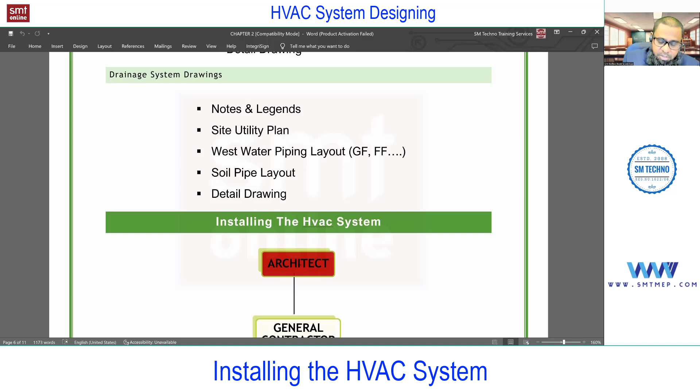So for a big project, it's a chain. But just at this level of installing the system, assume I'm talking about the HVAC subcontractor.

Now assume the architect, or the main consultant, has all the design drawings. Or you can consider the contractor. In case of a big project, the main consultant will provide the job to the main contractor, and the main contractor will provide the job to the design consultant.

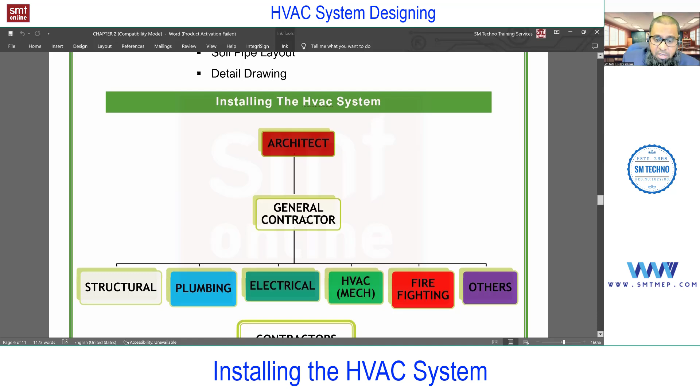Assume the design consultant completes the design, and the design drawing is submitted back to the main contractor. Now the main contractor will provide this drawing to the subcontractor. So this architect at this level is the main contractor, providing information and drawings to the general contracting company, which will provide the drawings to the subcontractor.

In the subcontractor category, you'll find structural, plumbing, electrical, HVAC, firefighting, etc. But at this level, we're bothered about HVAC. So we'll discuss HVAC. Just one minute, yes please.

So you are saying the architect is the main consultant? Yes, you can consider the architect as the main consultant. But in the main consultant team, you'll find the architect and mechanical and electrical engineers. For a small project, you can assume the architect is the main consultant.

But here you are saying the architect is the main contractor? No, the main consultant or the owner's consultant provides the job to the main contractor in case of a big project, or else directly provides the work to the subcontractors. It depends on the case. Just focus on the concept - in actual practice, as per location and type of project, these options may vary.

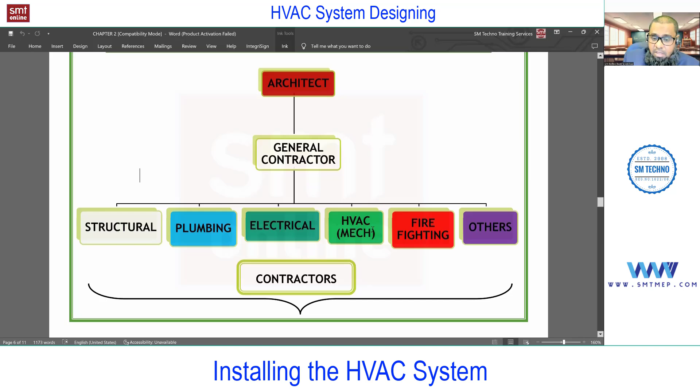So the point is, the contracting company takes care of installation. Here I'm bothered about HVAC. So what are the steps involved in installing the HVAC system? The mechanical or HVAC contracting company takes the HVAC consultant design drawing, also known as engineering or contract drawing - you can call this the tender drawing, from the consultant to the contractor.

Next, you'll find the term IFC also - issue for construction, or we can call the detailed design drawing IFC, or the shop drawing. You can consider IFC as issue for construction, as per the case.

So the mechanical or HVAC contracting company takes the HVAC consultant design drawing, also known as engineering or contract drawing or tender drawing, and then prepares the shop drawing, as we discussed in the types of drawings. Shop drawings are detailed drawings at larger scale, minimum A2 or A1 sheet.

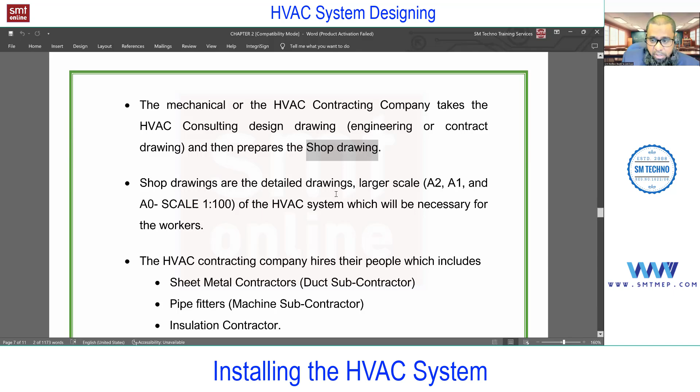I think as an engineer you know these paper sizes. The normal paper size is A4, right? So generally we will not use A4 on site - minimum A2 or A1 or A0, or you'll find larger than that. Most commonly, we use a 1:100 scale.

Scale can be 1:50, 1:150, 1:200, depends, but commonly 1:100. If you're not aware of this scale, don't worry, we'll discuss it at the time of dealing with the design. 1:100 means, just to give you the idea, in actual practice it is 100 times, but in drawing you can find only one time. For example, in drawing 1 mm equals, in actual practice, 100 mm. Or in drawing 1 feet equals, in actual practice, 100 feet. Because we don't have that much big sizes of sheet, so that reduction is required. So 1:100 means 100 times you're going to reduce.

So the most common scale we use in actual practice is on-site scale drawings, and they're required, or else it can be a big issue on site, because if you talk about duct length, pipe length, etc., they will cut according to the scale in the drawing. They will measure on the scale and multiply by 100. So 100 is the multiplication factor if you're using a 1:100 scale. This is very, very important. So shop drawings are detailed drawings, larger scale, A2 or A1 or A0 with the 1:100 of the HVAC system, which will be necessary for the workers to work on site.

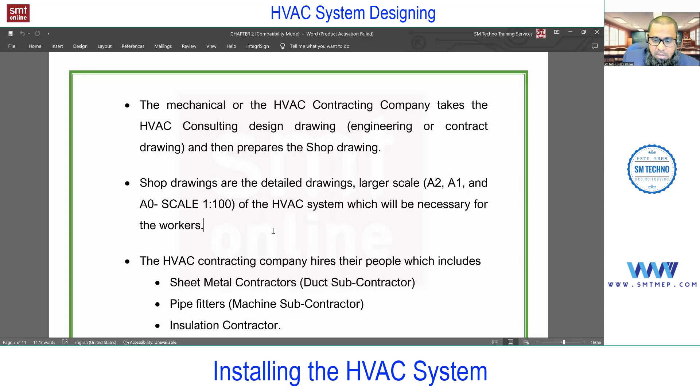Next, you see the HVAC contracting company has people who include the sheet metal contractor. Here I'm talking about subcontractors. The contractor, the HVAC contractor, will hire the subcontractor, or else they may have their own team of workers. So it depends on the case.

Some contracting companies have their workers on a salary basis, so whether there is work or not, they will pay the salary. Or else, some contracting companies, whenever they get the job, they will contact the subcontractors. So as per the job, they will pay, and after that, they will not pay anymore - they are not permanent workers for the contracting company. So as per the case, if it is a big contracting company, you may find their own team of workers - separate sheet metal workers for ducting, separate pipe fitters for piping, etc. Or it can be a separate subcontractor, depending on the requirement or the type of company.

At this level, I'm assuming that the main contracting company will divide the job to subcontractor companies. That subcontractor company - one is the sheet metal contractor who takes care of the ducting side. Here is an example for the duct. They will fabricate the duct, meaning making the duct, and they will do the installation for the duct.

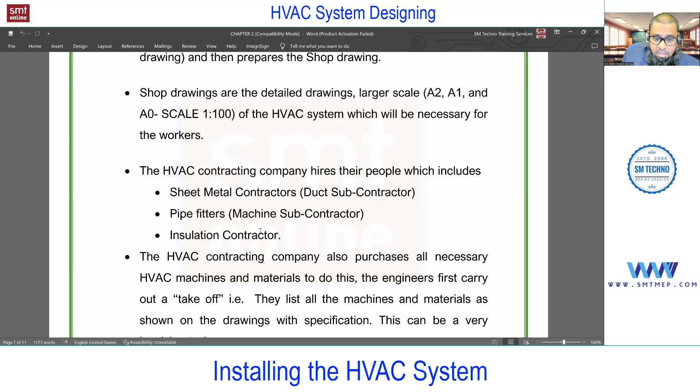Next, you see pipe fitters - they will take care of the welding and installation of pipe for the refrigerant side or for the chilled water side, etc. Then there's a separate insulation contractor who takes care of duct insulation as well as pipe insulation. At this level, if you don't know insulation, just remember insulation is used to reduce energy losses. We have a separate topic for insulation and installation in the installation video course.

Next, the HVAC contracting company also purchases all necessary HVAC machines and materials. To do this, the engineer first carries out a material takeoff, nothing but estimation. In this training program, we are offering this estimation video course also with the complete tower project. This is also important, and it's a lengthy task. It means they list all the machines and materials as shown on the drawing with the specification. This is very, very important - you must follow the specification as per the requirement of the project.

Now, who decides the specification? The design engineer, the consultants - they take the responsibility. The specification by the consultant is followed by the contracting company. The contracting company follows the specification, and the specs from the consultant are provided in PDF, or we can say PTS, project technical specifications in short.

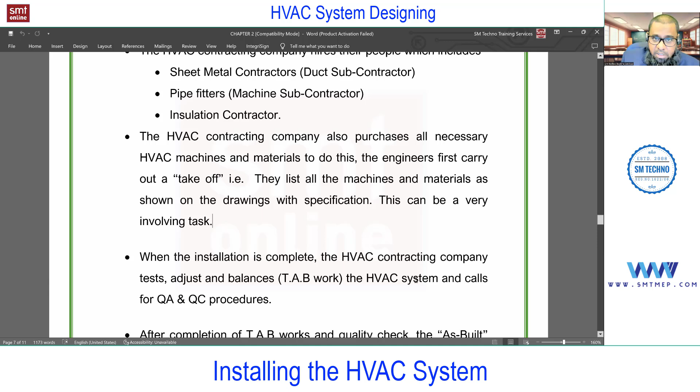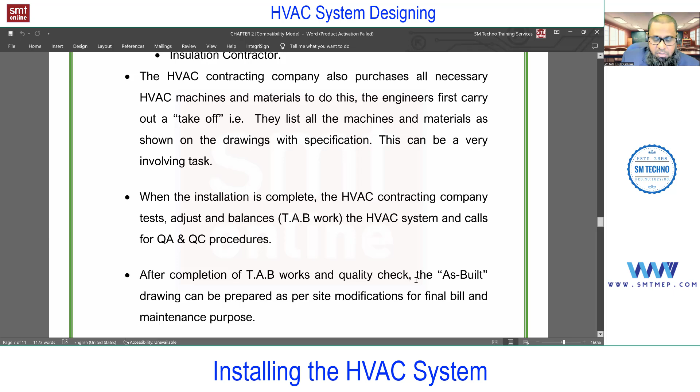Next, this can be a very involving task - it's lengthy, and you must read the specification, you must read the drawing, you must extract the material. So it's a very lengthy task - that is nothing but material takeoff. Now assume that the installation is done - the ducting installation is done, piping installation - just assume that after completing all this, purchasing all this material, after this material takeoff and all.

So after installation, then what? We require the TAB work. Nothing but testing, adjusting, and balancing.

Again, the TAB work also taken care by whom? The contracting company. Or for a very big project, the contracting company may hire a separate company, or provide this job to a separate company who takes care especially of this TAB work. For the TAB work, we have a separate society.

I forgot that name. BE, Bureau of... I forgot that term. We have a separate society for that TAB work. Does anyone remember? Some BEE, or I forgot. Okay, I'll get back to you. You'll find a separate society for this TAB work.

They deal with research and development for this testing, adjusting, and balancing. I forgot that term. Okay, I've given the instruction.

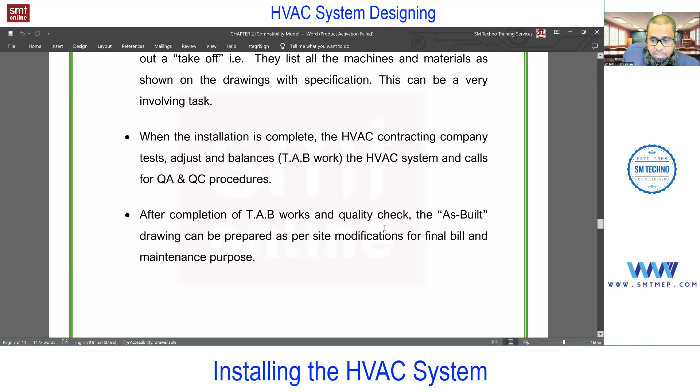I'll get back to it. So now, after completing the TAB work, quality check - QA and QC - is also required. This QA and QC will be taken care of by the contracting company, or the main consultant or client may appoint a third party for additional verification in a big project, or else the contracting company will take care of it.

It's IEEE, I think. It's IEEE, the society. No, one more specifically for this TAB work only.

I'll get it later. Now, after completion of TAB work and quality check, comes the as-built drawing. You know what an as-built drawing is? As we discussed, it can be prepared as per site modification for the final bill, and for service and maintenance purposes.

Okay, so this is the process for design and installation in actual practice for HVAC. And if you talk about other services, the process is almost the same.

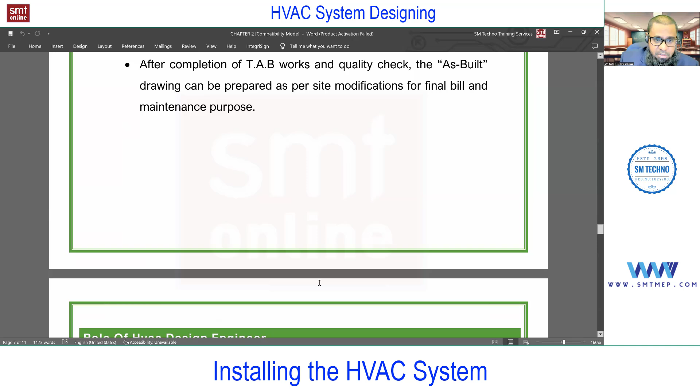So this was about chapter 2. Sorry, my mistake - we have 2 more topics to discuss: role of an HVAC design engineer and role of an HVAC execution engineer. I've given this in the list. You can go through it once.

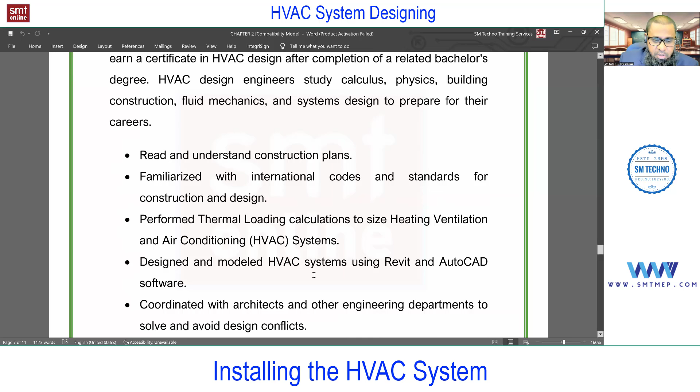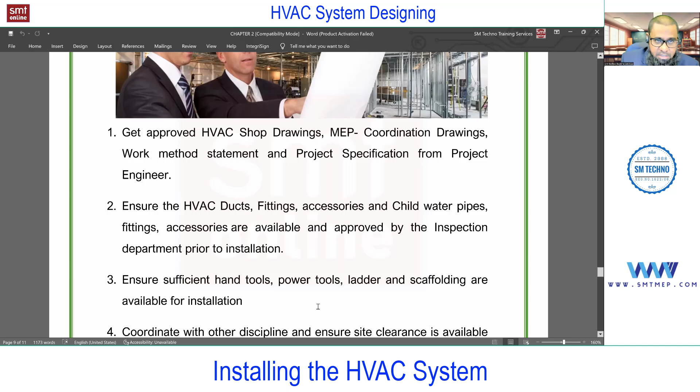I'll not explain this in class because this responsibility we'll discuss after a few classes, at least after chapter 5. At this level you will not get anything from these terms and terminology. Even what I've explained till now has some new terms for beginners. I'll hold this topic and we'll discuss it after completing chapter 5.

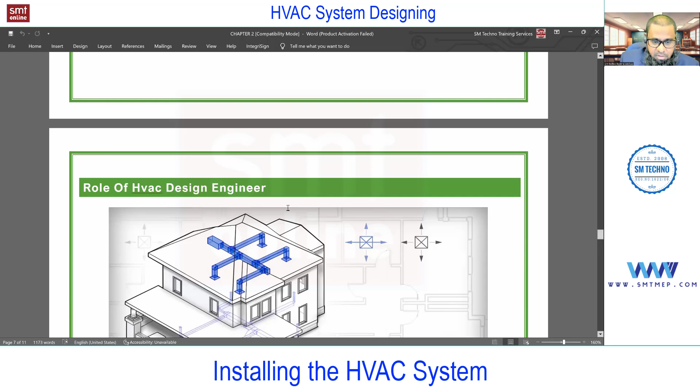With chapter 5, at least you'll get an idea about the systems, etc. But I request you to go through all these steps once. If you're a beginner, you must read it at least 2 to 3 times and try to understand the process.

Who is the consultant, who is the contractor, what are the different types of drawings, and who is responsible for what - so that in actual practice, when you're involved on the contracting side, you'll get an idea of your role for the installation side. If you're involved on the consultant side, you'll get the idea that your role is on the design side.

Again, on the design side you'll find the site supervision team, and even in contracting you'll find the design review team - for reviewing the design, preparing the shop drawing, or verifying the design as per requirement.

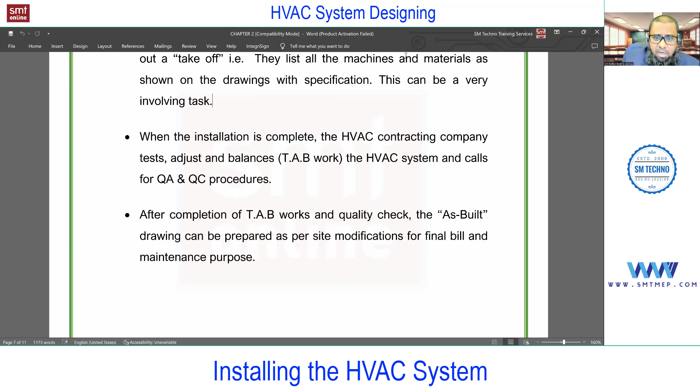Okay, knowing this will help you understand the process, especially the design steps we discussed, because I'm going to expand all these design steps in the next classes. This is very, very important, even from an entry point of view. So I'm going to expand all this in detail in the next classes.

So any questions online? Sir, one question. Yes, please. It's related to the installation.

So when I'm working on Revit, at that time I have to define the levels of services as per the coordination point of view. Yes, sir. So when working on Revit, I need to select the levels of services, like above the false ceiling, plumbing levels, ducting level, cable tray.

Okay, so what's the reason behind that? Cable tray will be above the ducting and all these things, and firefighting levels. So can you explain those things? Yes. So first of all, your question, what you asked at the beginning, about Revit...

That is when I'm working on the Revit. Okay, so you're working on the Revit. So forget about the Revit. So your question is why this cable tray is above this duct, right?

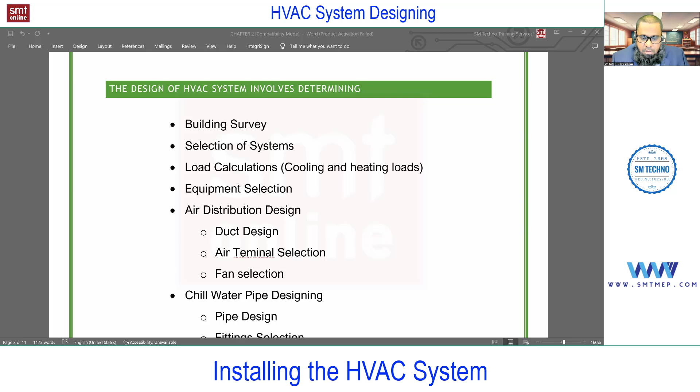Not only cable trays, that means how the levels are adjusted, with the coordination point of view, so that it cannot clash with other services. This is a very, very important point. In building survey chapter 6, we have point number 8 related to this. In detail we'll discuss, I'll give you a quick idea.

So you see, these levels are very, very important, because if an issue happens in one level, it will affect all the services. And it's a very difficult job to accommodate, for example, 1 feet false ceiling, to ceiling gap, and something like that.

So you see, first of all, in order to decide this, experience is required, and that's the reason in actual practice, this decision is taken care of by the architect or a senior mechanical or electrical engineer, because without experience, you cannot decide this.

And above the false ceiling, you'll find limited clearance, and in that clearance we need to set all this. So there is no question of reducing this cable tray height, because this is a standard, we cannot work on this. And even these pipes, firefighting pipes, chilled water pipe, or drainage pipe, we don't have much scope to reduce that, because this is based on the design.

So now we have an option for this duct. Remember, this height of the duct we are going to decide as per the available clearance, considering the clearance required for other services. This is very, very important. And as a HVAC design engineer, this point, as I said, we'll discuss in chapter 6, point number 8. And this is related again to duct designing.

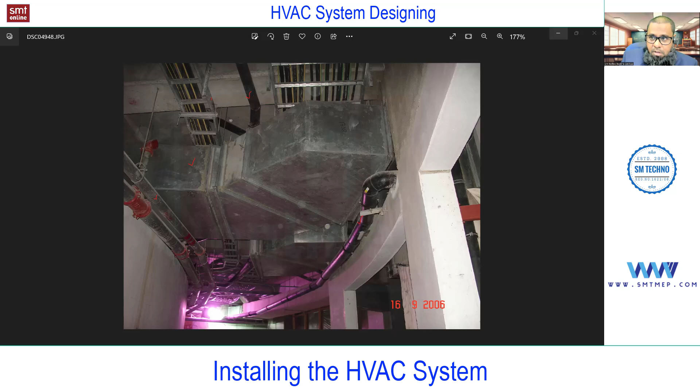Okay, you're talking about this—vertical sleeves in the slab, but also horizontal sleeves like on the beam. Yes, you'll find the sleeves in the beam, column, or even in slab.

So it is allowed, no issue, but only at the design stage. Later, after completing the structure, they will not allow any opening or disturb the structure. But initially, at the design stage, if you coordinate, definitely they will design the structure accordingly, considering this opening for these pipes, because this much metal is lost in the structure in the slab. So they will design the slab accordingly. Similarly for beams and columns, if you ask for pipe sleeves, they will design the structure accordingly. So at the design stage, yes, it is totally accepted—it's possible, but later opening is not allowed, except in some special cases, and that too for small openings.

You can see all the sprinkler lines passing through the beams only, and even the chilled water pipe can pass through the beam. But the pipe sleeves are required at the time of construction only, and the construction should be as per the design. I'll show you this at the time of piping—some images where you'll find the pipe sleeves for chilled water, for firefighting, even for plumbing. That is accepted, no issue.

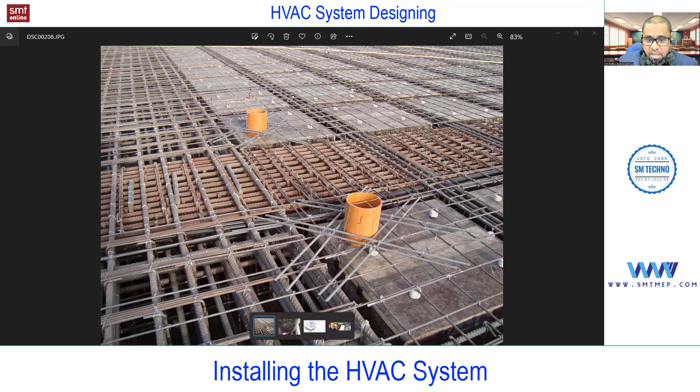So they must verify the drawing with the scale factor, or else what will happen if they don't verify? Without that, if they start production for the ducting, it will be of no use, because you may get length more than required or less than required. So with the scale, manually they are going to check the length with the scale on the paper. For example, if it is written say 100 in the drawing, they will measure and must get some value—say 1 centimeter, for example—so if it is 1 centimeter, they will consider it as hundred and verify accordingly. This is important, and an experienced contractor will check the scale when he gets the drawing, not only for HVAC but even for other services. Okay, then, thank you.